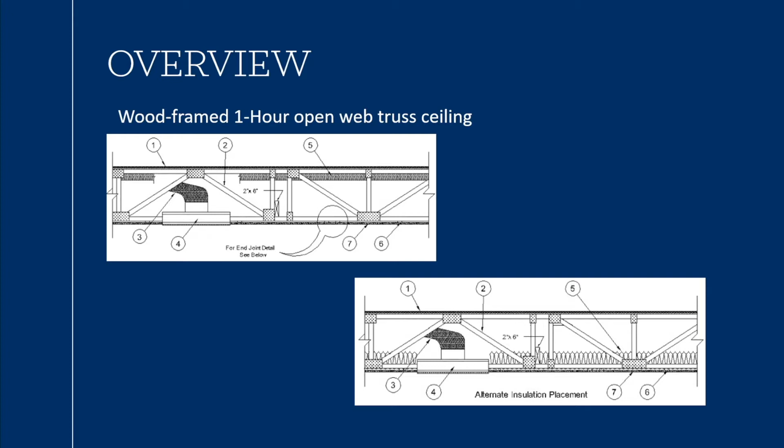You can see it shows the primary assembly with no insulation or insulation pinned to the top, and then it shows an alternate insulation position on this assembly. Why did we choose open web trusses? A trend that we've seen over the years is that open web trusses are a little more flexible when it comes to HVAC, plumbing, and electrical.

It allows you to run your equipment in any direction throughout the assembly, where an I-joist or a solid timber may not. In those scenarios, you're probably going to have to build soffits to run some of your ducting or exhaust vent fans, and that can be acoustically not perfect. It also adds to the difficulty for fire stopping and draft stopping at those intersections where the soffit may meet the wall and the ceiling, maybe not in the ideal position.

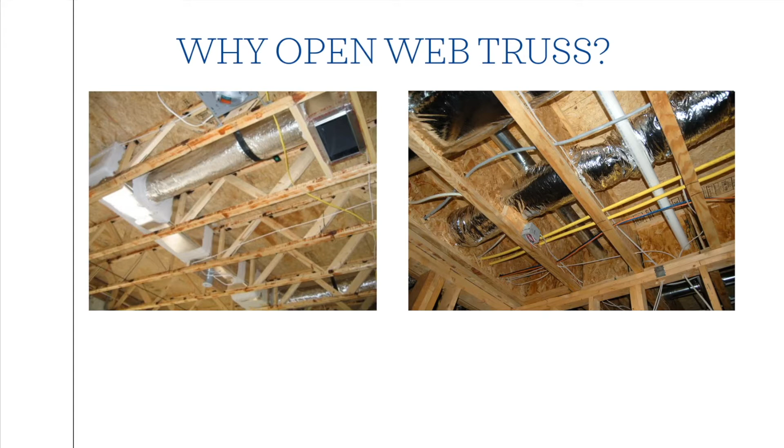So here's the system we're going to look at today, which is UL L587. It's an open web wood framed truss system. It's a 1-hour system, and it has the ability to add insulation to it. It also has the option for no insulation. So we'll get into that as we move forward here a little bit.

It's like mic timed out for some reason.

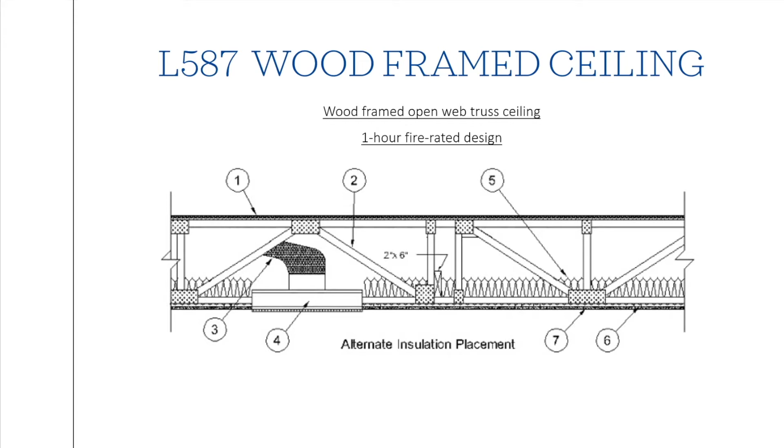So let's get to it. We're going to start at 1 and work our way all the way down, 1 through 10. Item 1 is the floor system. What that means is the material above the truss.

So there's 27 options for the top system. The two, let's call it minimum options, would be a layer of nominal 3/4 inch structural panel, plywood or OSB, and then a 1/2 inch structural panel or OSB again over the top of that.

Option 2, or system 2 as it's termed in UL's write-up, would be that same 3/4 inch structural panel, but with a poured in place material on top, minimum 3/4 inch. And then your 27 variations are going to be types of mat, thicknesses of the poured in place material, maybe alternate wood type products, or something like Homasote, which is also listed in this assembly. So there's a lot of options on the top side that can change the acoustical performance or the values that you see within the system.

So we're not specialists on that side. We do have a lot of knowledge when it comes to which mats to use, how much of the poured in place material to use, and also what the performance looks like without any of those materials in it. When we do our testing, a lot of times we'll test a bare system first to get some baseline data, and then we'll start building off of that.

Item 2 in here is the truss itself. The truss is maximum spaced at 24 inches on center, minimum depth of 12 inches. We talked about this before: there are a lot of maximum and minimum references in the UL fire resistive designs. With that being said, the maximum spacing is 24 inches on center, so you can always space them closer together at 16 on center. That can have some repercussions later down the road, which we'll get to when we talk about line items 5 and 6 and how those spacings can change the total cost and performance of the system.

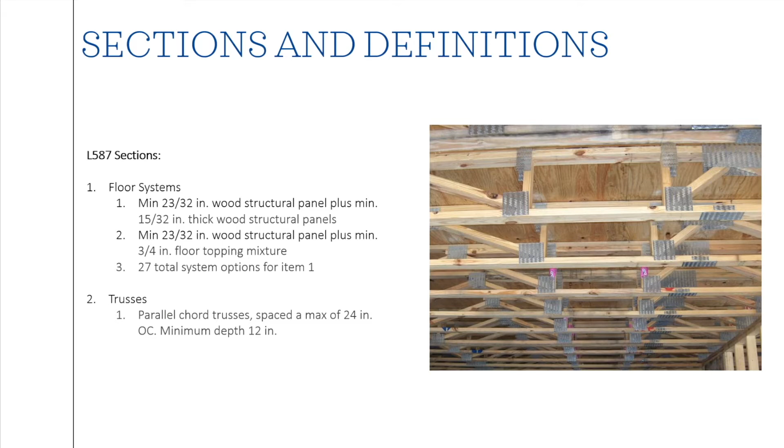So line 3, I did it again. Item 3 is your air duct. It calls out for any class 0 or class 1 flexible air duct. It doesn't call out for a rigid air duct. We're not HVAC specialists, so I'm sure there are some guidelines that say a flexible duct is a minimum, maybe a rigid is an improvement. I don't know. That's for the HVAC division to manage.

For the acoustical engineers, it was important to know that, because if you've got a flexible duct that maybe is or isn't wrapped correctly, you could have some weak points in the acoustics. But again, that's outside of our product base, so we don't spend a lot of time in there. I'm not going to go into too much depth on it. And then we have the ceiling damper itself, which is also part of that conversation for the acoustical engineer.

So now we're going to get into the parts where we see a lot of variation, which is the batts and blankets. You can see here glass fiber or mineral wool insulation bearing the UL classification mark. One thing to note is that insulation thickness and spacing may change the channel requirements, so it may change how your resilient products are attached or can be attached to your system.

There are 6 variations to the insulation section, all the way from glass fiber, mineral wool, your sprayed in foam, and also fiber sprayed insulation, where they put a net up and spray in the cavities. Those are all part of that insulation section.

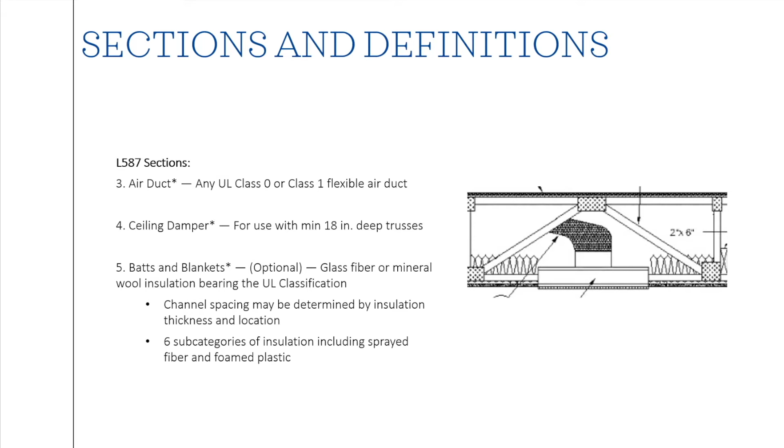So line 6 is the resilient channel. We've broken line 6 into a few sections. Part A of line 6 is the resilient channel itself. A resilient channel, as listed in here, can be placed at 24 inches on center when there's no insulation in the cavity, with a single layer of gypsum board. That's great for spacing. It passes the fire test just fine, but from an acoustical standpoint, it's probably not the ideal system to build.

So typically we like to see insulation in these cavities. Now you're looking at a 16 inch on center max spacing when you add insulation, and that insulation is limited to 3.5 inches and has to be placed, pinned or stapled to the top side of the system.

So it'd be stapled to the underside of the plywood or held in with, let's say, lightning rods or another manner that's approved by UL. So that gets us a minimum amount of insulation, gets us a good start into the noise control section of this system. Now, when you want to increase that insulation and/or move that same 3.5 inches from the top side of the assembly down to the bottom side and drape it over the back of the channels, now your channels have to go to 12 inches on center.

And what we see here is that increased channel spacing sometimes reduces the acoustical performance of the system. To what level is going to be determined on the set of test series that you've seen that give us some information on that. There's no finite number that says if you go from 16 to 12, you lose 2 or gain 2 or whatever that number is. But acoustical engineers, be aware that sometimes if you want to fill that cavity with insulation, or if you want to put R19 in, or a thicker amount of insulation, something more than 3.5 inches, and you want to move it down from that top side, you have to change that spacing on that channel.

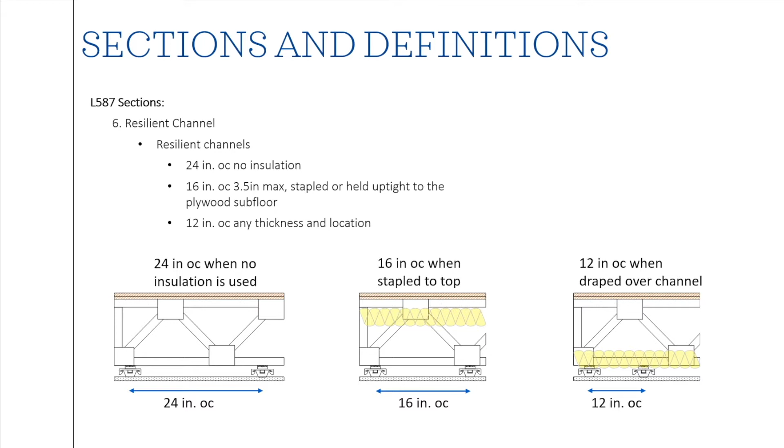Now, I'm going to cover something here. This is for this one assembly. Not all assemblies are going to have these same restrictions, but this is pretty similar with most open web trusses and a lot of other floor systems. So I think most of the I-joists will follow a similar line. Each assembly is going to have its own criteria, but this happens to be the criteria for this one assembly.

So now we get into the RSIC products or PAC products. And these are going to be your clips and your springs and your RC boost. So the PAC RC boost follows the same guideline as line 6, which states that you can go 24 on center with no insulation, 16 on center with 3.5 inches pinned to the top. And any insulation laid over the back or more than 3.5 inches, you have to change that channel to 12 inches on center. So again, acoustically, we're going to see some changes there, and we just need to be aware of those requirements so that during the design phase, we aren't designing systems that are unbuildable, or maybe not buildable in the intent that they were originally set up acoustically.

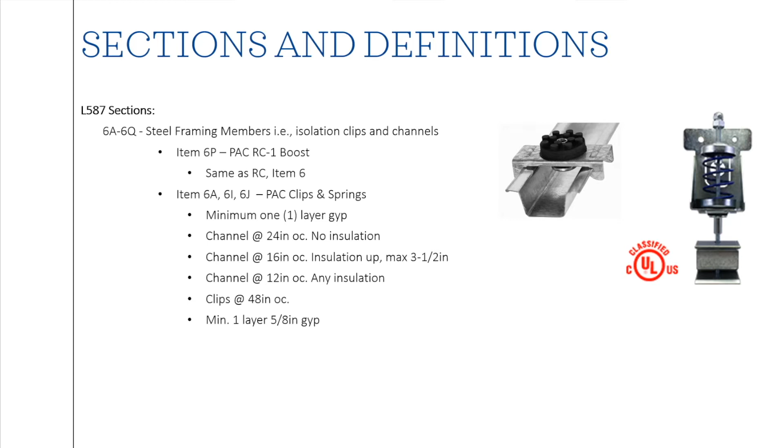Now we're going to get into some of the outliers, and we talked a little bit on walls about how some of the other products aren't really equal, even though they're similar in nature. They apply to the same areas. They do the same things acoustically. But from a fire life and safety standpoint, there are definitely some variations that can cause issues down the road or initially during pre-construction or construction phases of the project.

So we're gonna point out the line items and the item number. We're not going to brand anything here. So we've got 6A through Q. So these are all of the clips and springs that are involved with this particular system. So you can see here item 6C specifically doesn't state that it can be placed at 24 inches on center because its max spacing is 16 on center. Now, it also doesn't state that you can have insulation in this cavity.

We can make a general assumption that the rule of the system says if you're 16 on center, you can have insulation on the top side. This doesn't specifically state that. So what we've come up with is that it's really up to the building official on how they read the UL design and how they interpret it. So if you're reading it by the letter, 16 on center is still with no insulation. You can only have insulation in the system when you put the channels at 12 inches on center.

And with that being said, this particular 6C has to have 2 layers of 5/8 gypsum board anyway. And its maximum insulation can be 3.5 inches. So there's a lot of handicaps that come with this one line item. Some of this is still to be determined, but some of it is already predetermined where you can't go 2 foot on center. You have to go at 16 or 12. And if you add insulation, it looks like you have to be at 12 on center and 2 layers of gypsum board. So acoustically, we're okay with the 2 layers of gypsum board. That's great. More mass is always good for noise control. Insulation is always good for noise control.

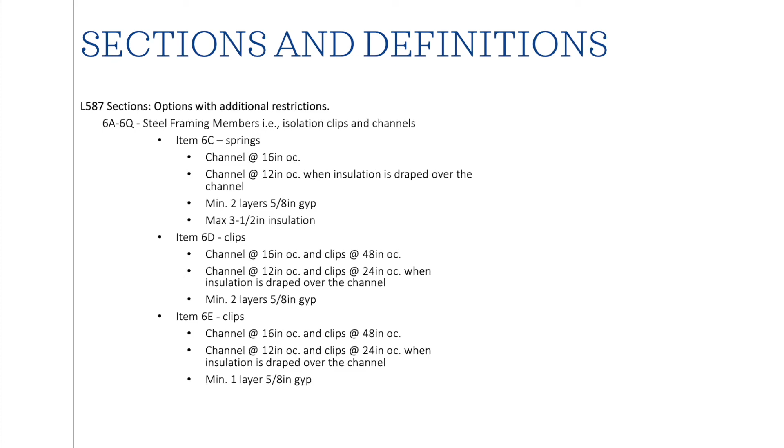Oops, I did it again.

So now we're into item 7, which is the gypsum board. Now, there's a lot of manufacturers involved in this one, which is part of the reason why we jumped ship from L521 into L587. L587 has more variation when it comes to manufacturers that are listed in the system. And again, it stuck with the Open Web Truss that we were looking for.

So with this system, your gypsum board, I don't know if anyone remembers the walls, they have it in 48-inch wide and 54-inch wide. With this system, because it's a ceiling, there aren't too many 9-foot wide ceilings where you need a 6-inch extra width on your gypsum board. So these are going to be 4 foot wide by random length, 8s, 10s, 12s, even 14-foot long 5/8 gypsum board. Your screw spacing into your channel or into your frame is 12 inches on center when there's no insulation. When you add insulation, the screws have to reduce to 8-inch.

There may be some play on acoustics there when you're screwing into RC channel. When you put more fasteners in, you are increasing the probability of a short circuit by increasing the number of isolators into that system.

I may have said type X earlier. The gypsum boards that are listed in here are type C gypsum board. ULIX is the only one that is, I guess, branded in here because that's USG's lightweight gypsum board. And I think it's the only lightweight that's listed in the system.

So again, back to the screw spacing, you've got your screws at 12 on center with no insulation, 8 inches on center when you insulate the cavity, which again may or may not cause some issues with RC channel. With the RSIC clips and other spring isolators, you shouldn't have any issues because those screws are far enough away from structure that you're not going to see short circuits.

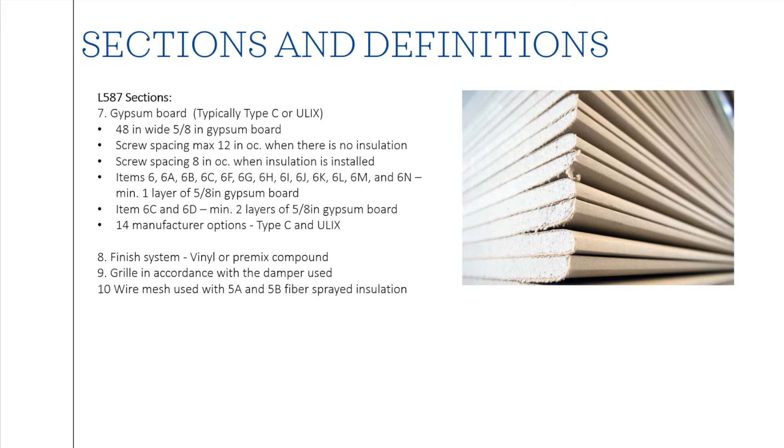So that's it for the assembly, and yeah, there was a lot of information there, really just on the insulation and channel sections. You can imagine when you add in the 27 options for the top side from an acoustical standpoint, how many other performance levels you can get out of that. Just based on mat, no mat, poured in place material directly on the plywood. Maybe a 1/2-inch mat, 1/4-inch mat, 3/8, 5/8, 3/4, 1.5-inch mat.

There's all kinds of options there, and a lot of manufacturers that are involved there. So you're going to have to go to those manufacturers to find out what their systems add or don't add to the base acoustic system that's there. So, back to how do I find all this information out, and how do I apply it correctly? UL is a great source. They actually give you everything online.

The most difficult part with UL is working through the system like we have just done there, determining which product is allowed to use, how much insulation, what the spacing is, how much gypsum board is needed, where can the insulation be placed within that cavity. So there's a lot of text to read and a lot of text to interpret.

Another source is your ICC evaluation service. So those are provided from the manufacturer. So the good thing about the ICC evaluation service is that it does take in a fire test and a sound test and builds a summary of the system, and then it states it was this UL fire test or this fire test done at this lab on this day, and here's the test number. It doesn't necessarily have to be UL.

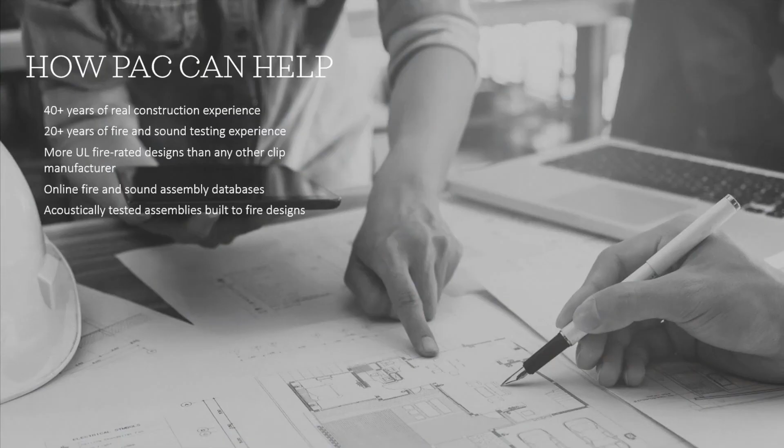So how can PAC help? We talked about a little bit with giving you these options. Again, we have a wealth of knowledge in the construction industry, over 40 years of real construction experience, swinging a hammer, running a screw gun, doing all of the dirty work out in the field that has given us the ability to design and build products with that in mind, not just a great engineered product, but also a product that's engineered correctly for fire life and safety, for sound, and for constructability.

That's a big push for us, to make sure that our products, when they go into the job, see similar results to the fire test and sound test that we've done. And that just comes with the experience of being in the field and doing that.

We have over 20 years of testing at UL, and also not at UL, but mostly at UL, and then also acoustically testing our products all around the world. We've tested not only in the States, but outside of the US and a few other places. So we've got a good wealth of knowledge. I think we've tested at almost every acoustic lab in the US. I'd have to go back and look, but we've hit most of them.

And then we have our online fire and sound assembly databases. So that's our big push right now, to give the acoustical engineers, the architects, the builders, developers, our suppliers, everyone, the access that they need to get either their customers the answers they need, or to get themselves the right answers to be able to write the spec correctly on the first swing.

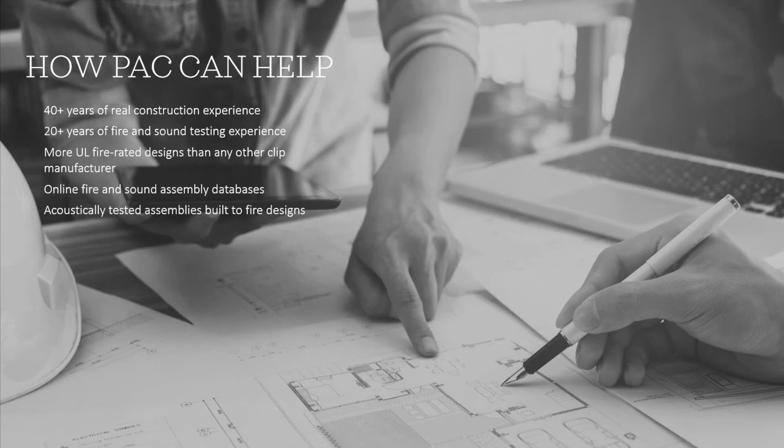So we give you the links to go straight to the UL fire resistive design. We've got them on our site now. We update them, gosh, I'd say probably once every month or two, because UL is doing updates quite often. You can also link straight to the ul.com website and go there. But the reports are here, so you can start thumbing through and look at the products and see if there's any limitations on spacing, insulation placement, number of layers of gypsum board, all of those things, especially now that you kind of have an idea of what to look for.

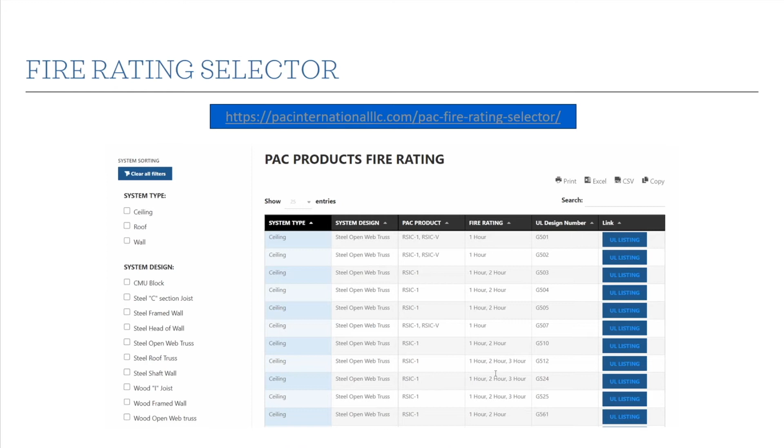So one thing that we're doing is I'm getting ready. Well, I've been processing this for quite a while now. It's a new UL fire resistive design selector. It is much more in depth, and it's going to have those details that we just covered in it. So if there's a clip that has to have 2 layers of gypsum board, it'll be listed in here with 2 layers of gypsum board.

If it's a PAC product, it'll be listed with 2 layers of gypsum board. If it's a non-PAC product, we're not going to show you what it is. That's for you all. But we're going to list how all of the PAC products break out. So here I've taken L587. I've just shown RSIC-1. Just the PAC products on here, I think, is 18 lines.

So there's 18 options with just PAC products between no insulation, pinned to the top side, full cavity of insulation laid over the furring channel, and then fiber sprayed on here. So those are the 4 options in this system, which again line up with our RSIC-1, RSIC-V, RISC SI1 Ultra. All of our clips really follow the same guideline.

So you can see here, as you scroll across, this is a long spreadsheet. So we've broken it down on the left-hand side and it allows you to search, and then we've also given you this detail page. So what you can do, and the GUI interface isn't set up yet, so it's very bare bones.

But when you click on one of your lines, it'll give you the summary of that line, including the links to the UL design, link to an acoustical test report, and the link to the acoustical summary page for the builders, developers, architects. They don't really need the whole report typically, but the acoustical engineers need access to all that. Now those test reports, the summary pages are through your login. So if you don't have a login, when you click on that, you'll get routed to a please log in page or a register page.

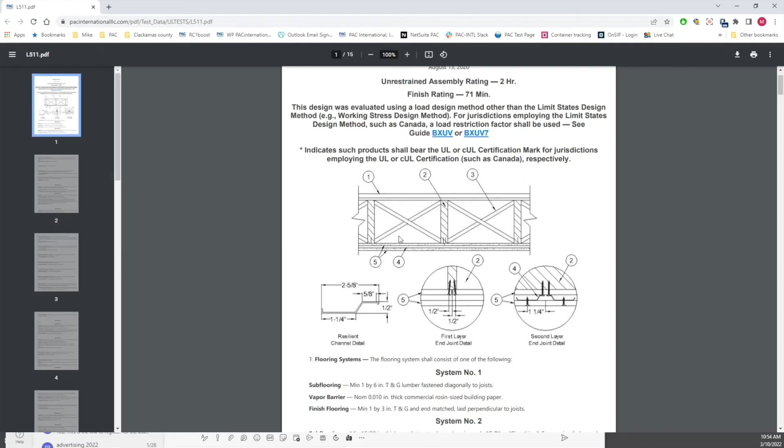My apologies. So I pulled up a 2-hour fire rated solid timber system, and I pulled that right off of our product fire rating selector. I just put in 2 hours, scrolled down, and I saw a solid timber right here.

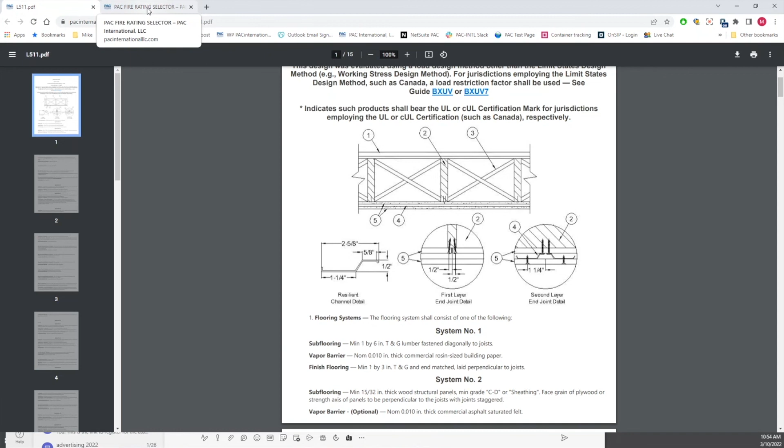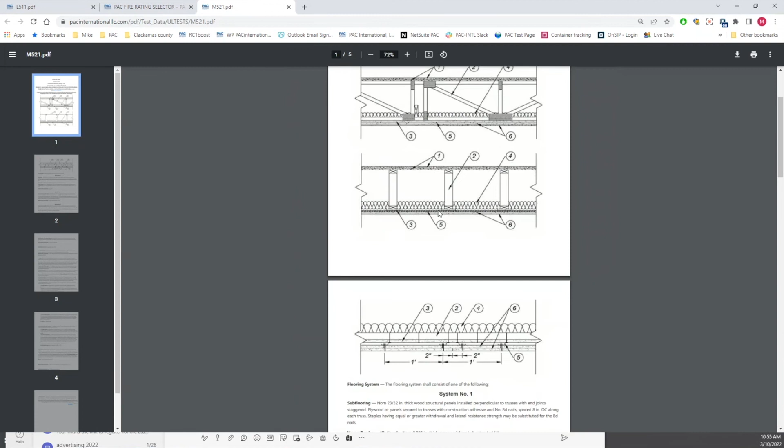Yeah. So there was one that we were just looking at where instead of having a continuous gypsum board layer that's attached directly to the structure, it actually just required a 6-inch wide rip of gypsum board to be run parallel to the structural members. And then you had your additional ceiling layers and things like that down below it. Right. And so that actually kept exposed the large cavity there within the trusses, which is from an acoustical standpoint way better than the typical design. So that's something to look for.

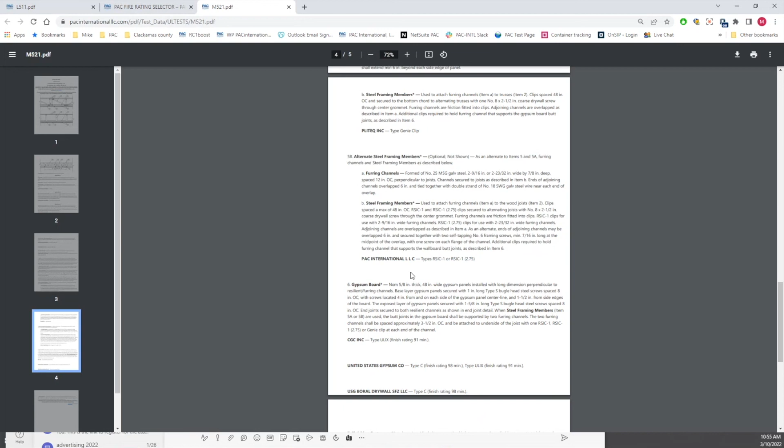And yeah, you can go look into our fire design selector. You can find ones that are 2-hour rated. But there can be some really big differences between the acoustical performance in those systems, so it's worth hunting around for ones. And maybe that's something that we can figure out how to include in our more detailed fire design selectors. I'm not sure how we'd work that in, but probably something we should consider.

Sure. Elzo, I imagine you have things to add. Yeah, that particular design is a USG proprietary design, which is also the owner of the ULIX, which you referred to earlier in the conversation. And the ULIX design uses a cavity fill batt insulation, but under the provisions of the National Fire Sprinkler Code, if you have a cavity, let's say an 18-inch deep truss, if you fill that cavity, you don't have to sprinkle it. But it also has a provision in that same NFPA 13 that if you create a cavity less than 8 inches, you don't have to sprinkle it.

So in an 18-inch deep truss, if you threw in a 12-inch batt, from an omission of the fire sprinkler portion, you also have the latitude. So if you fill the cavity or create a cavity of less than 8 inches, you can avoid sprinkling the hidden cavity in that fill. So that's all I wanted to throw in, and thank you.